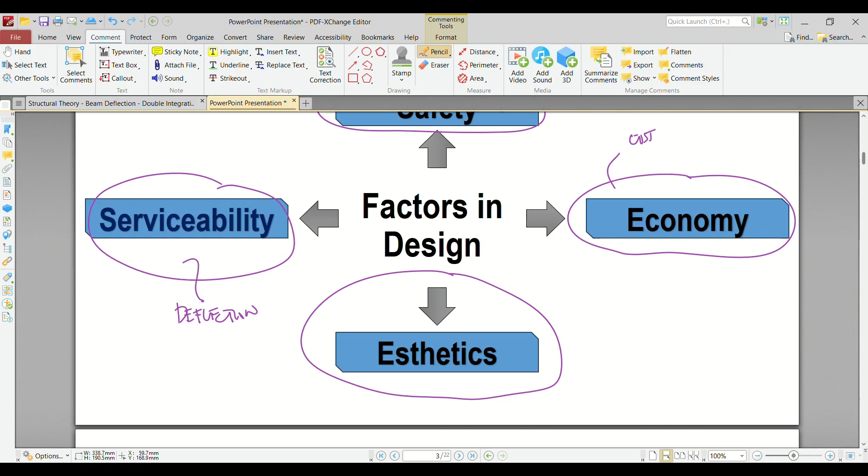Okay, so in beam deflection, we have various sources. Where do deflections come from? Number one is loading. Of course, any material subjected to any kind of loading will be subjected to deformation. Deformation is just another word to describe deflection in terms of structural theory, but they mean the same thing. We know this from mechanics of deformable bodies. For example, if I have a bar and I compress it, of course that bar will be subjected to shortening. It will become smaller. So that's the number one source of deflection.

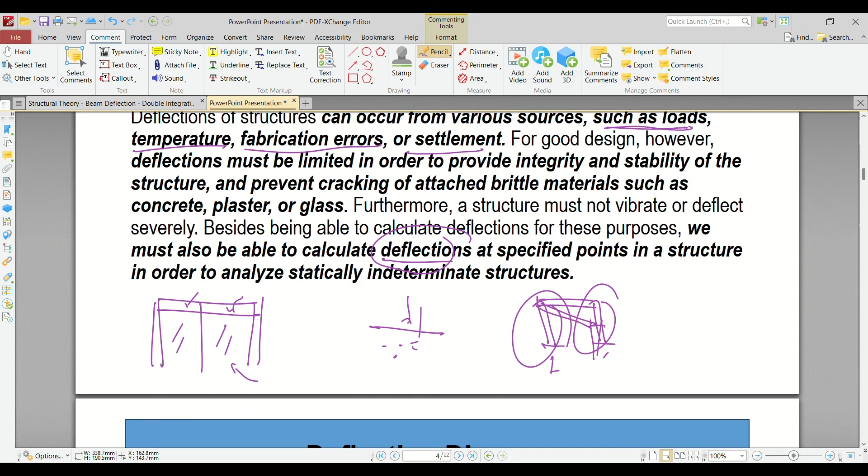Furthermore, a structure must not vibrate or deflect severely. Besides being able to calculate these deflections for these purposes, we must also be able to calculate deflection at specified points in a structure in order to analyze statically indeterminate structures. In indeterminate analysis, if we want to get the exact value of the moment, shear, and axial of a framing system, we must first calculate the deflection at specified points. Once you calculate the deflection, it does have an effect - say the beam has deflection, it affects the value of the moment, shear, and axial of a framing system. So it's truly important to calculate the deflection.

So what are the different principles we need to discuss in beam deflection? In beam deflection, we need to discuss the deflection diagram. This is important - what is a deflection diagram? Before the slope or displacement of any point on a beam or frame is determined, it is often helpful to sketch the deflected shape of the structure when it is loaded. This deflection diagram represents the elastic curve or the center line deflection of the member.

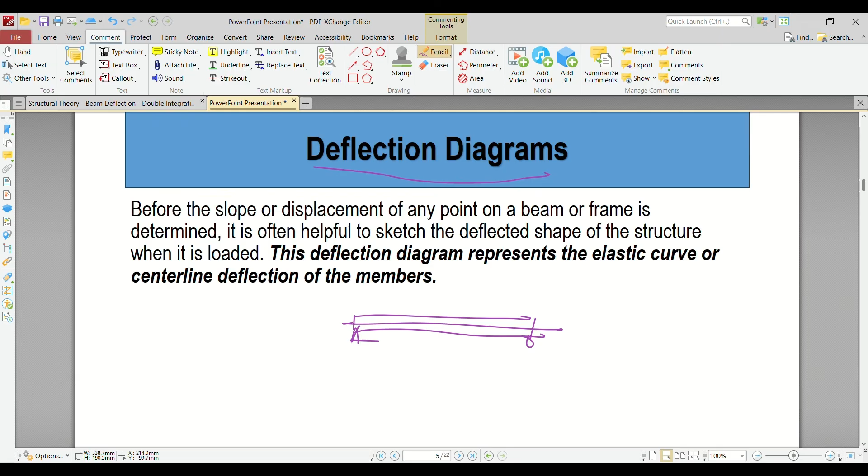What does that mean, class? For example, we have a beam, simply supported. The beam has a center line, or the middle, or the neutral axis as we call it. If this beam is subjected to loading - any loading - the beam will be subjected to deformation, or in our case, deflection. So what we do, and why we draw the diagram, is to represent the elastic curve.

Remember class, that is a curve, and that curve has an equation. Let me repeat - the deflected shape of the beam, its appearance, its line - because it's a line, or rather a curve - that curve has an equation, and that is called the elastic curve. Understood? The elastic curve is the center line deflection of a structural member.

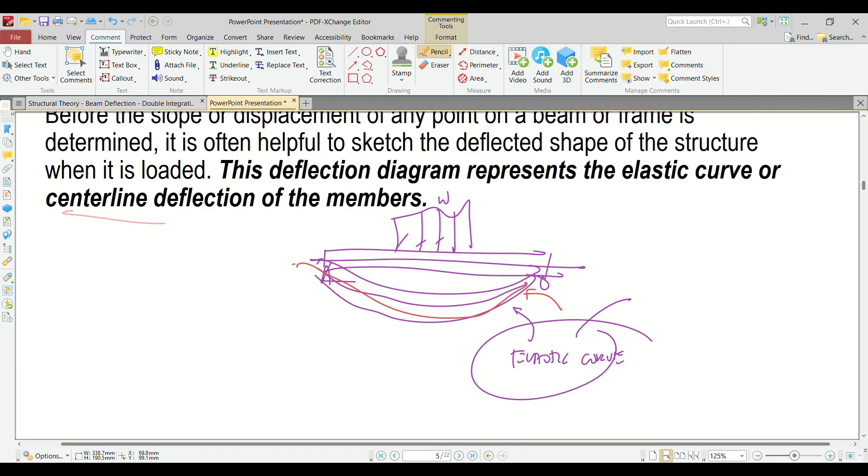Okay, so it's written there - center line deflection of members. Let's fully define the elastic curve. What is the elastic curve? The elastic curve is the curve that passes through the centroid of each cross-section of the beam, and in most cases it can be sketched without much difficulty. It's actually easy - what do we need to remember?

So ngayon, anong kinaibahan niyan sa pin support? Sa pin support kasi class meron. Paano ko nasabing meron? Kasi kapag naglagay ka ng tangent line dito, ganyan yung itsura. Pag naglagay ka ng horizontal line, ganyan naman yung itsura. So as you can see, it produces an angle like this. So meron talagang slope dito kapag pin support.

So ganun din po kapag roller ha. Kapag roller, meron din pong slope pero wala po siyang deflection. Ulitin ko, kapag pin tsaka roller, walang deflection pero merong slope. Kapag fixed naman, walang deflection, walang slope. Okay? So sana ma-understand natin yan.

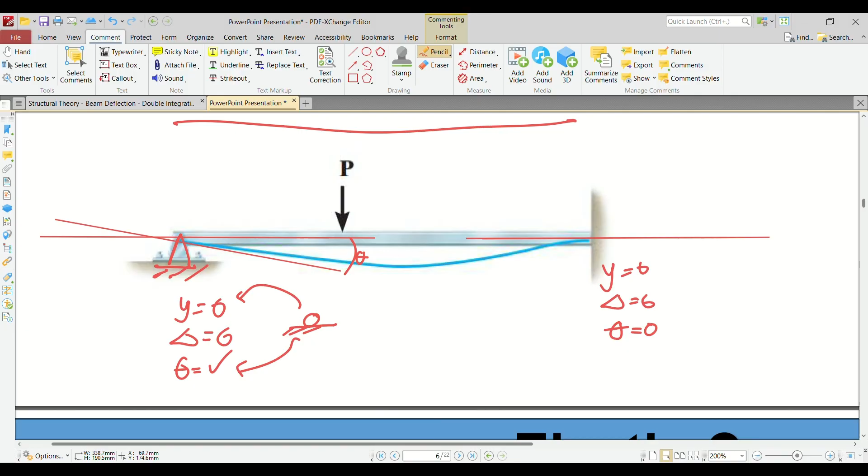So paano natin i-drawing yung elastic curve? So kung meron kang loading, of course, i-project mo lang yung deflected shape ng beam. So alam natin kapag pin tsaka fixed, walang deflection. Kapag fixed, wala ding slope. So magkakaroon ka ng elastic curve. Ito po yung blue line. Ang tawag po dyan is the elastic curve. Madali lang siya i-drawing in theory.

By the way, class, this is exaggerated. Kasi nga, hindi mo naman nakikita yung deflection in real life. So, makukompute lang natin yan, pero hindi natin masusukat natin, pero mahirap siya makita. So, kung maliit lang ang deflection, of course, mas maliit ang slope, mas maliit yung rotation. Okay? Again, yung blue line na nakikita nyo dyan, that is the elastic curve.

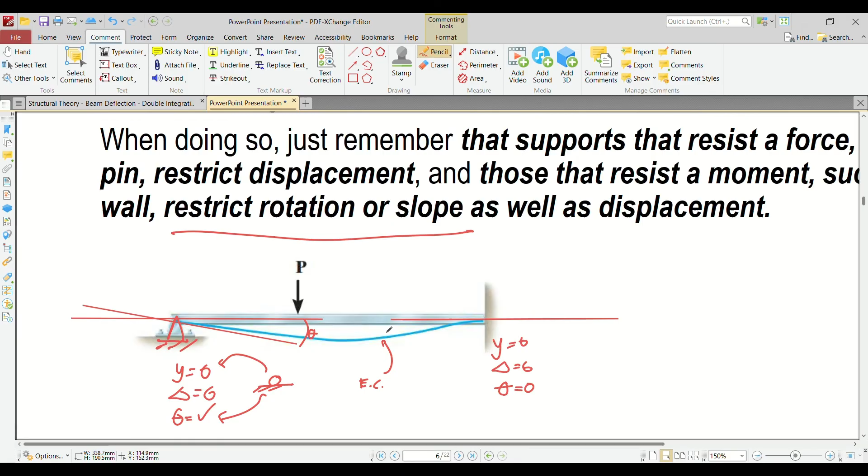Okay? So, ngayon, paano kung mahirap i-draw yung elastic curve? By the way, kukuha lang ako ng figure. Wait lang ha, hindi kasi nasama. Paano kung mahirap i-drawing yung elastic curve? Anong gagawin natin, class? O, pag mahirap i-drawing elastic curve, ganito.

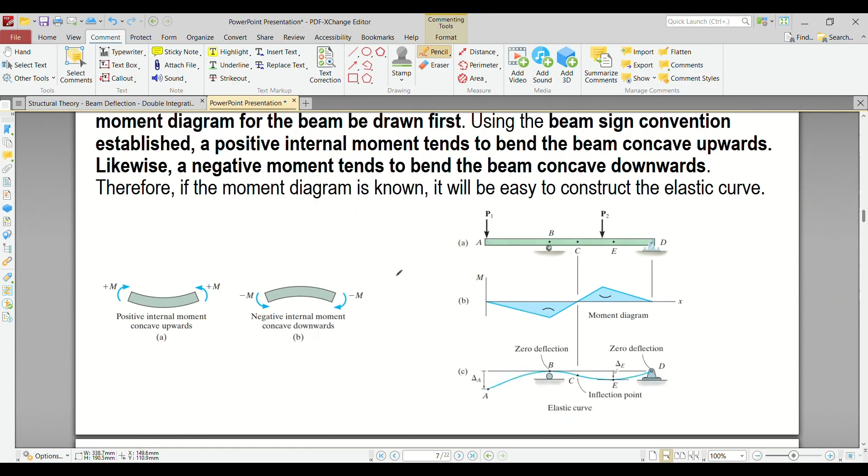If the elastic curve for a beam seems difficult to establish, it is suggested that the moment diagram for the beam must be drawn first. Using the beam sign convention established, a positive internal moment tends to bend the beam concave upward. Likewise, a negative moment tends to bend the beam concave downward. Therefore, if the moment diagram is known, it will be easy to construct the elastic curve.

Anong ibig sabihin yan, class? Paano daw kapag meron na tayong multiple loading? Just like this one, baka medyo mahirapan tayo sa pag-drawing ng elastic curve. Kasi dito, madali lang kasi single loading lang. What if we have multiple loading? Paano natin i-drawing daw yung elastic curve?

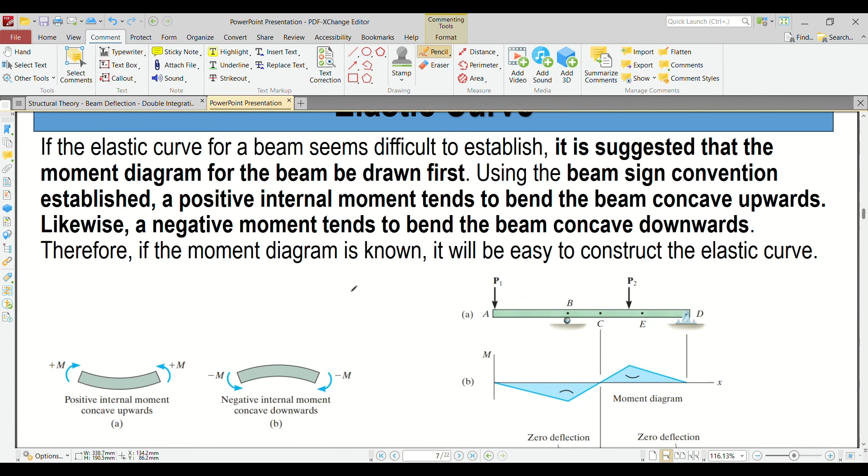Mas maganda daw kapag nagdo-drawing ka ng elastic curve is you need to draw the moment diagram. Anong ibig sabihin? Bakit ka kailangan mag-drawing ng moment diagram? Kasi pag na-drawing mo yung moment diagram, nagiging basis mo siya for the deflected shape of the beam. Anong ibig ko sabihin? Kapag positive moment, class, binibend yung beam mo concave upward or pa-happy face. Kapag negative moment naman, yung moment diagram mo, binibend yung beam mo concave downward or sad face.

So paano yun? So for example, we have this beam subjected to P1 and P2 loading. So sa baba, makikita yun yung moment diagram. So from point A to point C, as you can see, the moment diagram is negative. Now from point C to point D, the moment diagram is positive. So makikita nyo rin sa elastic curve yung kulay blue na line. So from point A to point C, that is projected concave downward kasi nga negative moment. Ngayon from point C to point D, that is projected concave upward kasi nga positive moment. So ganun lang po. Kung nahihirapan tayo mag-drawing ng elastic curve, i-drawing natin yung moment diagram para mas mapadali tayo.

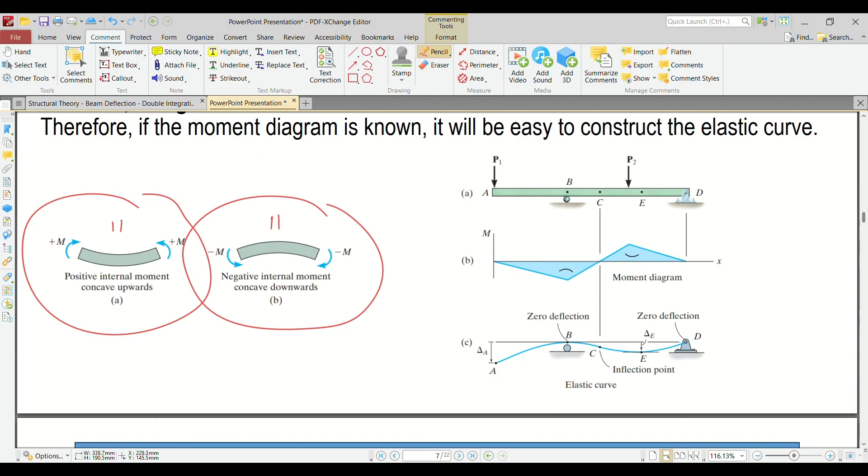Okay? So ngayon, let's derive the moment curvature relationship. So paano natin i-derive to, class? So wait lang, magpapalit lang ako. Baka nabura kasi yung mga nakasulat dito para mas madali tayong mag-derive, no? So, palitan ko lang yung module, ha? Okay, so we're back, no?

So, eto na tayo. Meron na tayong derivation dito. Paano ba natin i-derive to, class? Ngayon, mag-start tayo with differential strip. So, for example, we have a beam subjected to any kind of loading, kahit ano, no? Kuha tayo ng isang maliit na element. Yung width niyan, class, tawagin nating dx.

Yung dx class is located at exactly na neutral axis of the beam. So, kunyari, ito yung neutral axis, no? Tawagin natin yung distance from here to here, this is dx. Okay? So, ito yan ha. Ito yung differential strip na to ha. Nilakihan ko lang. Ngayon, anong mangyayari, class? So, sukat kang y distance from the top, simula dito hanggang dito, sukatin natin y distance. Tapos, tawagin natin yung nasa taas, ds prime. Ito rin yan. Okay? So, ano bang mangyayari if the beam is subjected to loading?

So, mangyayari, class, magiging parang part siya ng sector ng circle. Parang ganito, para siyang pizza pie, no? So, ano mangyayari dyan, class? Yung sa neutral axis natin, ito pa din, no? Ito, magiging dx. Yung sa taas, yung y distance from the dx sa taas, no, magiging hindi to ds prime ha.

This is ds, class, magiging ds prime. So what's the difference between ds and ds prime? Bakit ganon? Kasi yung dx natin hindi nagbago, no, nung nag-bend yung beam. Kapag, again, ito ay hindi pa subjected ng loading, ito subjected ng loading.

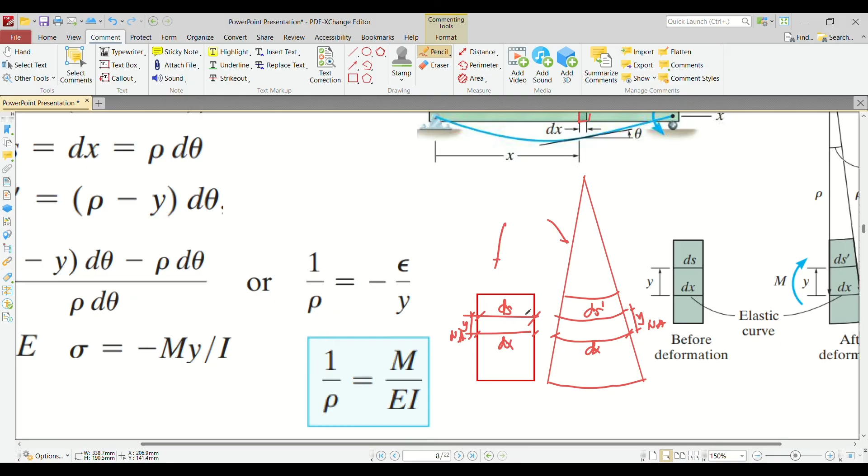Ba't ganon? Ba't nagbago? Yung dx, same lang, yung ds prime, yung ds, naging ds prime. It all revolves to the stress diagram of bending stress. O ano ba yung bending stress diagram? So, kunyari, meron tayong ganito class, no? Ito yung representation ng bending stress ng beam. So, ano bang mangyayari dyan? Kunyari, kino-consider natin yung beam na yan, ganito mangyayari na bending stress dyan. Bending stress diagram.

Okay? So, paano mangyayari dyan? Sa top part, makaka-experience ng compression, so papunta sa left. Sa bottom part, makaka-experience ng tension, so papunta sa right. So, ito class yung neutral axis natin.

Ngayon, ito class, ang height niyan para makuha mo, that is fb = My over I. So, kadalasan yung y class pinapalitan ng c. C represents the distance from the neutral axis to the extreme tension or compression fiber. But yung mas generic na formula is my over I.

So, ganun din sa kabila, no? Para makuha mo tong height nito, this is my over I pa rin. Pinagkaiba lang nila, this is in compression kasi nga, magko-compress yung beam mo sa taas, just like what happened in this one. Sa baba naman, may stretch, so that is subjected to tension.

Ngayon, class, kapag nagsukat ka ng y distance immediately after the neutral axis distance, no? Sa taas ng neutral axis, y, ito yung makukuha mo na stress. So, as you can see, sa neutral axis, we don't have any bending stress. And the beam is subjected to bending stress, no? Dahil wala tayong bending stress, of course, wala din tayong deformation.

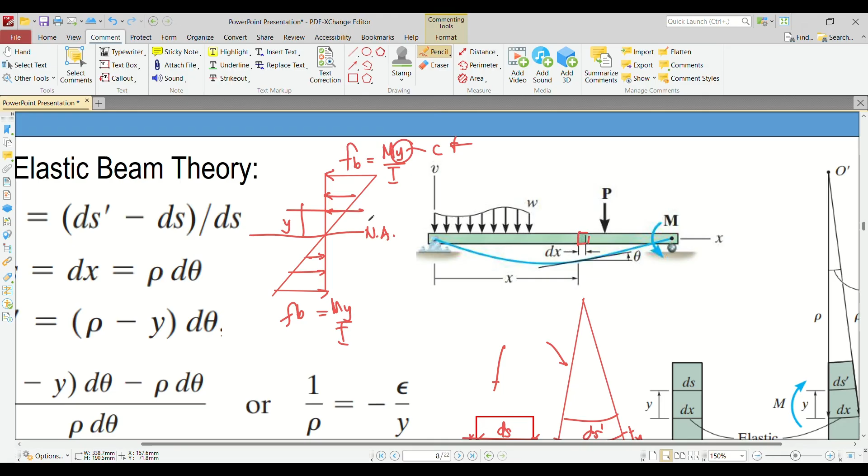Pero immediately after the neutral axis, it can be either top or bottom, in our case, in top, no? Magkakaroon tayo ng stress. Kapag meron tayong stress, of course, we do have what do you call this? We do have deformation. So kapag deformation, itong ds na to, hindi natin pwedeng tawagin ds din to. Kasi nga, nagkaroon na tayo ng deformation. So tawagin natin ds prime yan.

So ngayon, anong gagawin natin dito sa dalawang to? How can we derive the formula for the elastic curve? So madali lang class, no? Gagamit lang tayo ng concept ng strain. Ano ba yung concept ng strain? Sabi ng strain, para makuha mo daw siya, that is change in length over original length.

So in our case, the change in length is ds prime minus ds over ds. Okay? So yung change in length natin, ds prime minus ds, and then yung original length natin, ds. Okay? So ngayon, paano natin to i-derive further? We need to calculate what's the value for ds prime tsaka ds. Paano ba natin makukuha yon?

Since this is a sector of a circle, we can use the concept of a circle. Paano ba yon? So ngayon, dahil dx to class subjected, para siyang, di ba, part ng circle, ito subjected to sa angle. So tawagin natin d theta yung angle. Itong angle na to class is in radians, no? Ngayon, para makuha natin tong value ng dx, since this is a part of the circle, and dx is an arc length of a circle, kailangan natin ng radius, o ito yung radius natin. Radius of curvature, no? Tawag dyan rho, no?

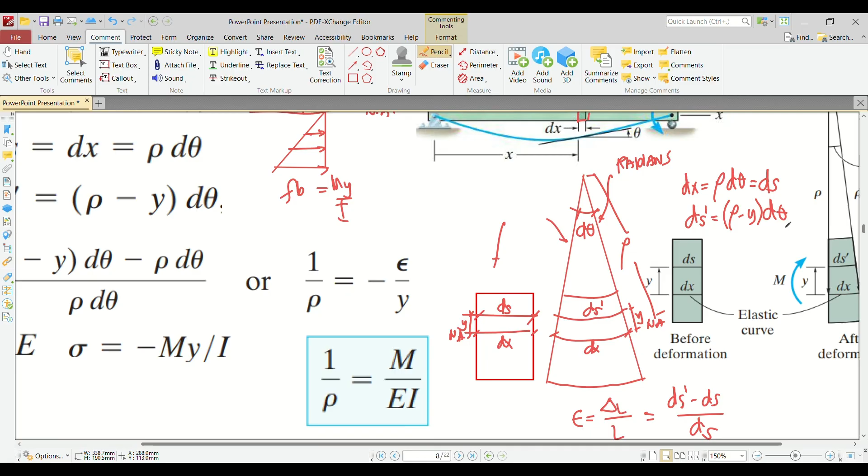So, paano yon? E di gawin mo rho minus y. Ito yung rho mo. Ito yung y. O ito yung naging radius ng ds prime, no? Multiplied by d theta. So, meron na tayong ds prime tsaka ds.

O, we can now substitute that here. So, ito naging formula natin. Again, ds is equivalent to dx, which is equal to rho d theta. ds prime is rho minus y multiplied by d theta.

Ngayon, ano mangyayari sa derivation natin? Pwede na natin i-plug in yan dito. Yung ds prime mo, rho minus y d theta. Yung ds is rho d theta. Ang mangyayari, class, pwede natin i-cancel si d theta. Tsaka si rho, tsaka si negative rho.

So, ano nangyari sa calculation natin? Ang nangyari, class, is 1 over rho is equivalent to negative strain over y. Bakit nangyaring ganon? So, ganito yan, class, no?

So ang mangyayari, ang matitira dito, class, is negative y over rho. I want to isolate 1 over rho. So ang gagawin ko, yung negative y, lilipat ko sa kabila, so magiging denominator, yung y, tsaka negative. So ang mangyayari, class, is 1 over rho is equivalent to negative strain over y. So yun yung nakita nyo dito.

Okay, so ngayon, alam naman natin na based on stress-strain curve, meron tayong tinatawag na slope of the stress-strain curve. Ano yon? Yung slope, class, is E, or the modulus of elasticity. That is equivalent to stress over strain.

Ngayon, pwede nating kuhanin si strain dito, tapos i-substitute natin dun sa formula natin. Paano yan? So edi cross multiply, no? So is equivalent to stress over E.

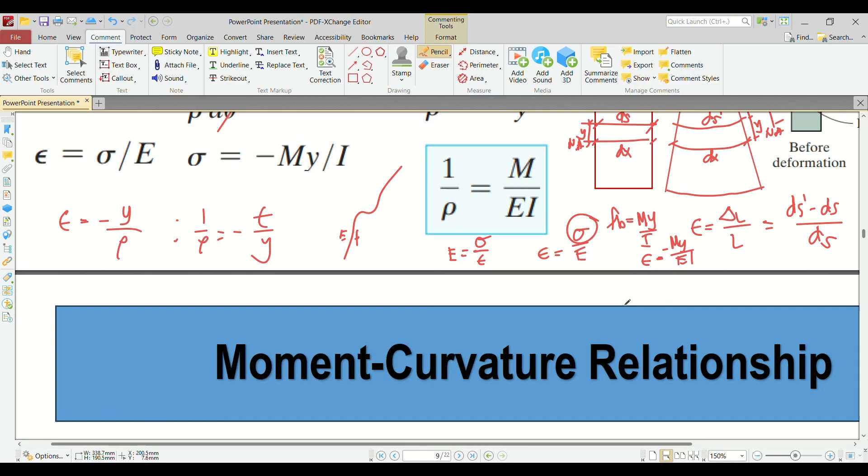So by the way, since compressive bending stress ang pinag-uusapan, this has a negative value. Okay, so itong value na to, pwede mong i-substitute dito.

So pag sinubstitute mo yan, ang mangyayari, class, si y, dahil may y ka dito, pag sinubstitute mo yung e, or yung strain, mangyayari, magka-cancel si y, magka-cancel din si negative, so the resulting equation now is 1 over rho is equivalent to M over EI. Okay, so ano yung 1 over rho, class?

Yung 1 over rho ay tinatawag na radius of curvature, no? Sorry, yung rho is tinatawag na radius of curvature, yung 1 over rho is tinatawag na curvature. Lumalabas po yan sa board exam. Okay, ulitin ko, ha. Yung rho is the radius of curvature, and then yung 1 over rho is the curvature.

Okay, and then yung M is the internal moment in the beam at the point. E is the modulus of elasticity. I is the beam's moment of inertia about the neutral axis. Okay, so ito na, stick na tayo sa formula na to. Again, yung 1 over rho is the curvature, rho is the radius.

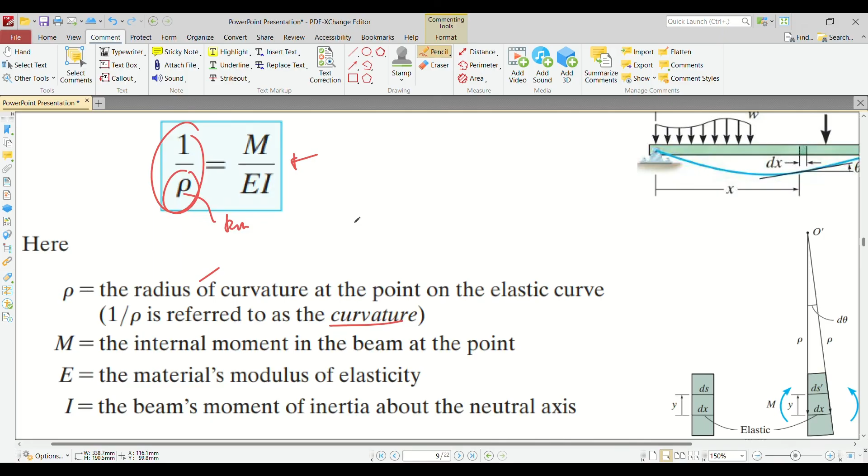So ngayon, anong gagawin natin dito? We need to relate this. Since this topic is double integration method, we need to relate this into double integration. Paano yon? So meron kasing curvature formula din sa differential calculus. Ano yon? So ito yung formula ng curvature sa differential calculus, class.

So ano to? So yung nasa taas, class, pwede mo rin yan tawagin na y double prime. Itong nasa taas, pwede nating tawagin y double prime. Ito, class, na nasa baba, pwede mong tawagin na y prime or yung slope. Again, yung y prime is the slope that is equivalent to tangent theta.

Okay, so ngayon, in order to derive this further, yung tangent theta, class, pwede pa nating i-simplify. Kasi for very small angle, remember yung slope natin, sinabi ko kanina, napakaliit, kasi nga exaggerated yung mga drawing natin. For very small angle, tangent theta is approximately equal to theta.

Okay, ibig sabihin, ito daw yung slope. Ngayon, class, kung meron kang very small angle, meron kang very small na value, in-square mo pa, this will be approximately equal to 0, itong part na to. Kasi maliit na ngayon theta eh, in-square mo pa, so magiging 0 na to, itong part na to.

So ilan natira sa equation natin? Yung natira sa equation natin, class, is 1 over rho is equivalent to, meron kang natirang 1 raised to 3 over 2. Ano ba yung 1 raised to 3 over 2? That is just equivalent to 1, so hindi ko nasusulat, y double prime na lang.

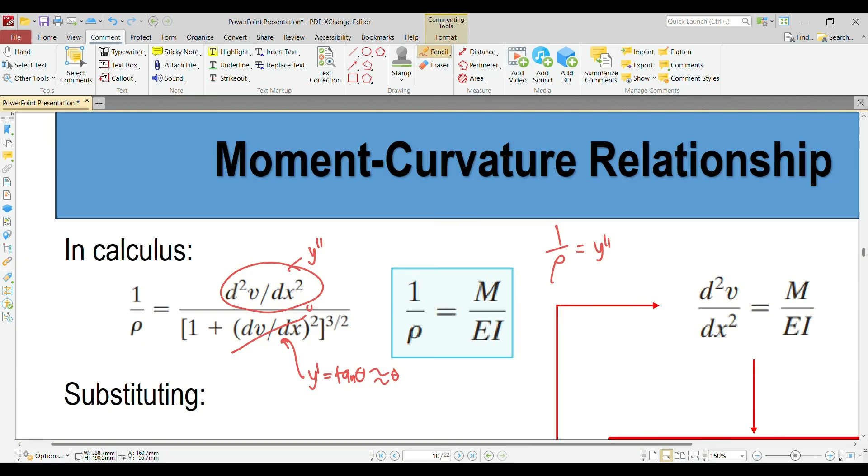Okay, so meron kang 1 over rho dito, meron ka ding 1 over rho based on the beam, so pwede nating pag-equalin. So anong resulting equation ang mangyayari sa atin? So ito, magiging EI y double prime. So from here, pwede nating i-simplify dito, so bali magiging y double prime is equivalent to M over EI. So pwede nating ilipat to if the beam is prismatic and same material.

Pwede nating ilipat sa kabila, gawing constant. So, magiging EIY double prime is equivalent to M. So, this is now the formula for the elastic curve of the beam. Remember, elastic curve is a curve, so ibig sabihin, it does have an equation. Dito natin makukuha yung equation ng elastic curve, sa EIY double prime.

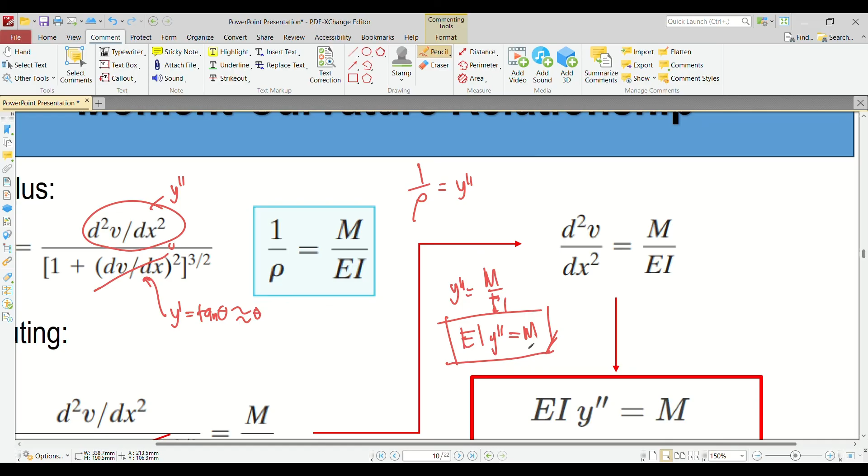Okay, discuss natin kung ano-ano yung mga variable dyan. Sabi dito, class, in integrating EIY double prime is equals to M, the resulting solution must contain two constants of integration, since EIY double prime is equals to M is of second order. These two constants must be evaluated from known boundary conditions concerning the slope and deflection at certain points of the beam. So anong ibig niya sabihin? Bakit kailangan natin mag-integrate ng dalawang beses?

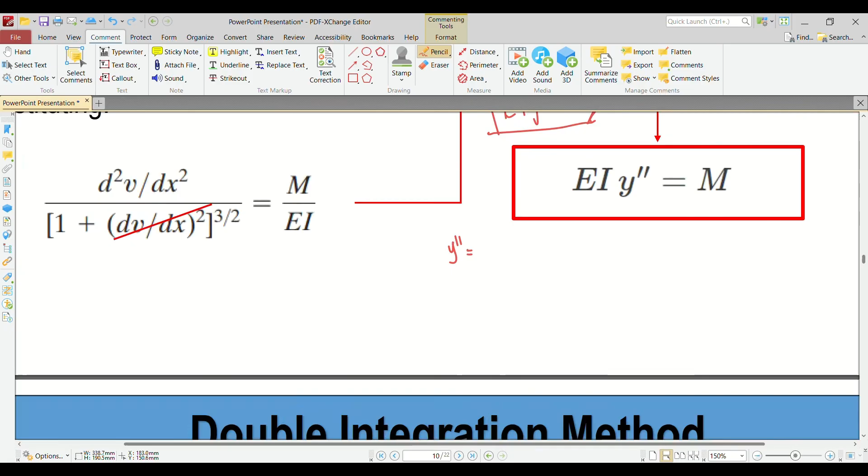So ganito kasi class, no? Yung Y double prime, tanggalin ko muna yung EI kasi constant naman, no? Yung Y double prime, remember, this is the elastic curve equation. Ngayon class, kapag in-integral mo yan, magiging Y prime yan. Ano ba yung Y prime? Again, based on my statement kanina, this is the slope of the elastic curve. Ngayon, another integration, this is now where you produce the deflection equation. So ibig sabihin pala, yung Y double prime, para makuha mo yung deflection, integrate mo na dalawang beses.

And of course, kapag nag-i-integrate ka ng indefinite, ibig sabihin wala pong limit, kailangan mo mag-add ng two constants. Kaya nakasulat dito, magkakaroon ka ng two constants. And those two constants can be solved using boundary condition.

Ano yung alam natin na value ng slope at deflection? Kapag pin support or roller support, alam natin wala tayong deflection dyan. O delta, tsaka Y, parehas lang yan. Ngayon, ano pa yung alam natin boundary condition? Kapag fixed end, wala tayong deflection, wala din tayong slope. So yun yung known boundary condition. Mamaya, di-discuss natin fully, but for this one, ito muna.

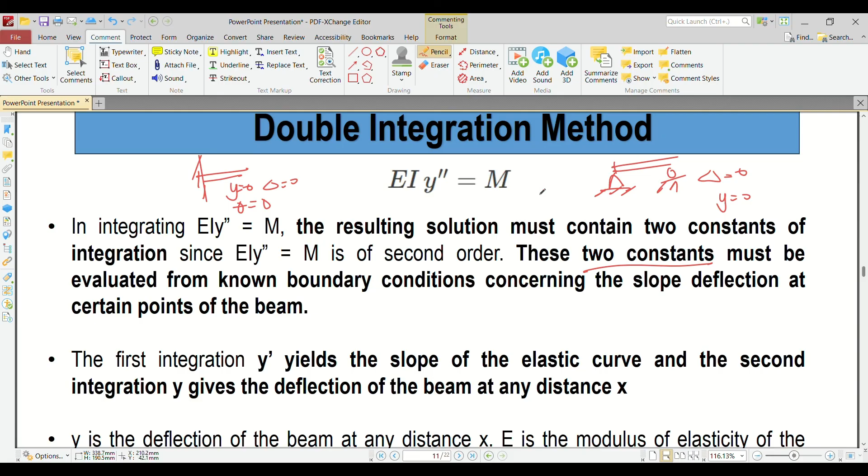Now, again, just like I did earlier, yung Y prime is the slope of the elastic curve, and the second integration, Y, gives the deflection of the beam at any distance x. Y is the deflection of the beam at any distance x, E is the modulus of elasticity, I represents the moment of inertia about the neutral axis, and M represents the bending moment at a distance x from the end of the beam. The product EI is also called flexural rigidity. Kadalasan kasi class, yung E tsaka I hindi separate na binibigay. So pag sinabing flexural rigidity, ibig sabihin pinag-multiply na yung E tsaka I doon.

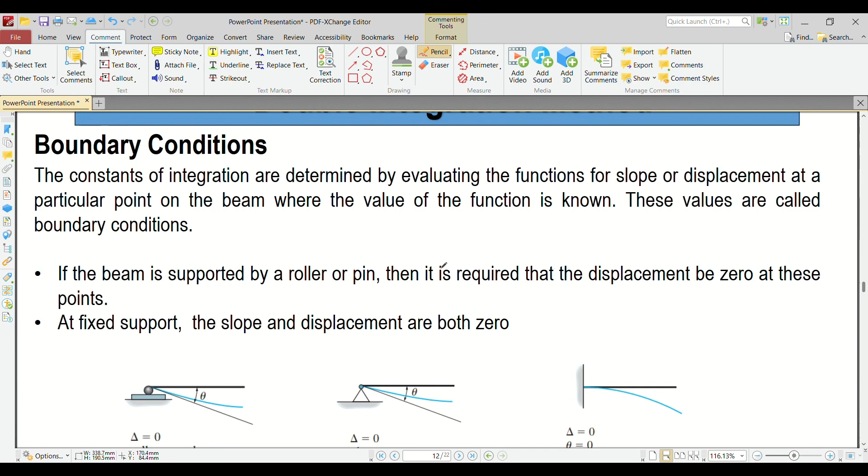Okay, hopefully you do understand. So now, let's discuss the boundary condition. The constant of integration are determined by evaluating the function for slope or displacement at a particular point on the beam where the value of the function is known. These values are called boundary condition. If the beam is supported by a roller, then it is required that the displacement must be 0 at this point.

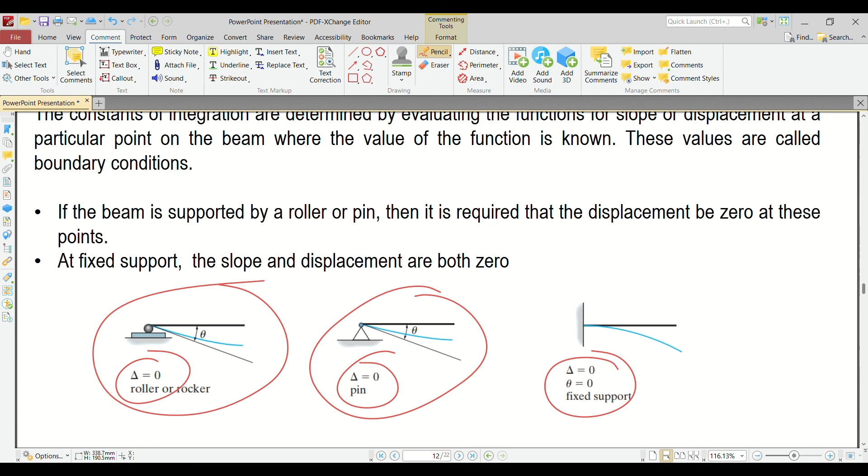So just like I said, kapag roller tsaka rocker, kapag pin, ang deflection mo ay 0. Ngayon, at fixed end, the slope and displacement are both 0. So nakikita nyo dito, yung deflection tsaka yung slope ay 0. So yan yung gagamitin natin na boundary condition in order to get the value of the two constants ng integration.

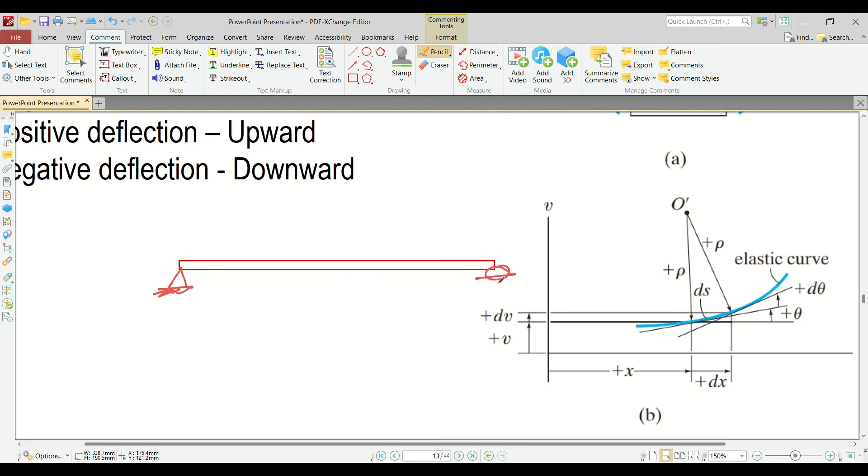Okay, so now let's discuss the sign convention. Madali lang naman yung sign convention, class. So for example, we have a beam, simply supported na lang para madali, subjected to any kind of loading. Pero drawing muna natin yung support. So kunyari, subjected yan sa kahit anong loading, W. So ano mangyayari sa beam natin? Of course, the beam will deflect, no? Ganito yung itsura ng beam deflection. Tapos paano natin makukuha yung sign convention?

So pag nag-double integration tayo, class, ganito yung sign convention. Lagay ka ng tangent line dyan. So let's say we want to get the value of the slope here, and we're going to determine if it is positive or negative. Dapat i-consider mo for the sign convention is always the rotation from the horizontal line to the tangent line drawn from the curve. So anong ibig sabihin nun, class? Kunyari ito yung horizontal line, ito yung tangent line. Yung rotation niyan, class, as you can see, is clockwise. Kapag clockwise, class, tingnan natin dito. Kapag clockwise, inaasahan mo na slope value dyan ay negative.

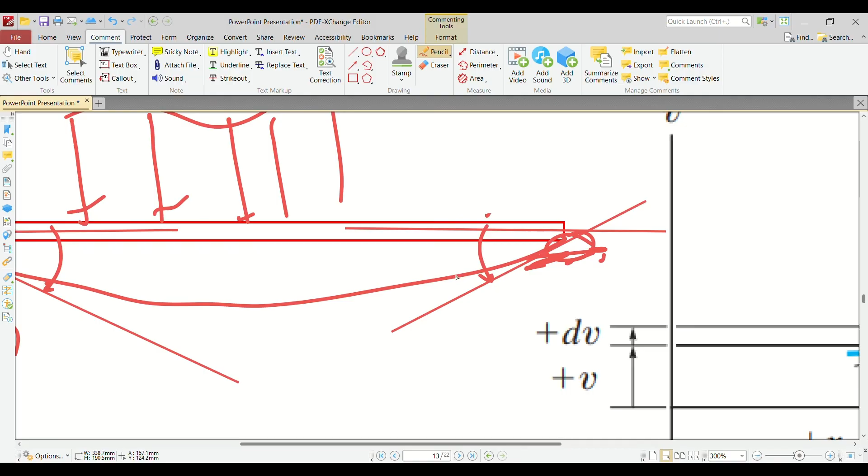So sa kabila, kapag maglagay ka ng tangent line dito, tapos ito yung horizontal line, as you can see, the rotation from the horizontal line to the tangent line is counterclockwise. So yung inaasahan na slope mo dyan should be equivalent to positive.

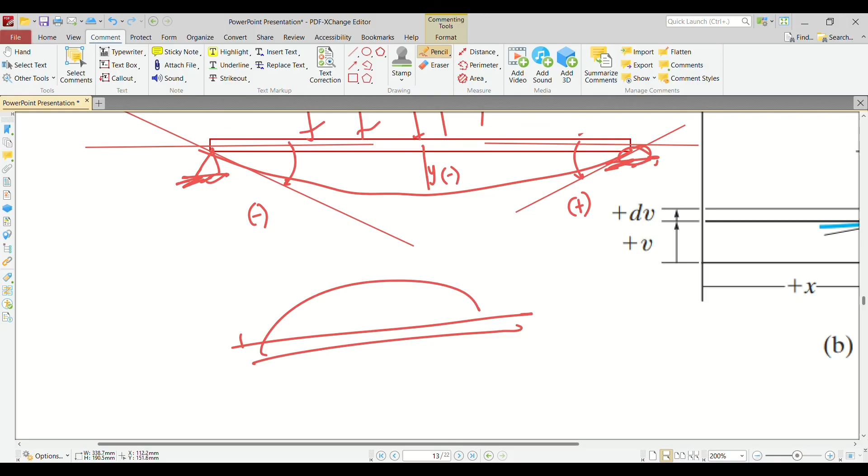Okay, so paano naman kapag deflection? Kapag pababang deflection, class, inaasahan mo na value sa calculation mo should be negative. Ngayon, kapag pataas naman yung deflection, let's say meron kang beam, tapos nag-deflect ng ganyan, ang asahan mong value dyan should be positive. Hopefully na-realize yung sign convention for double integration method.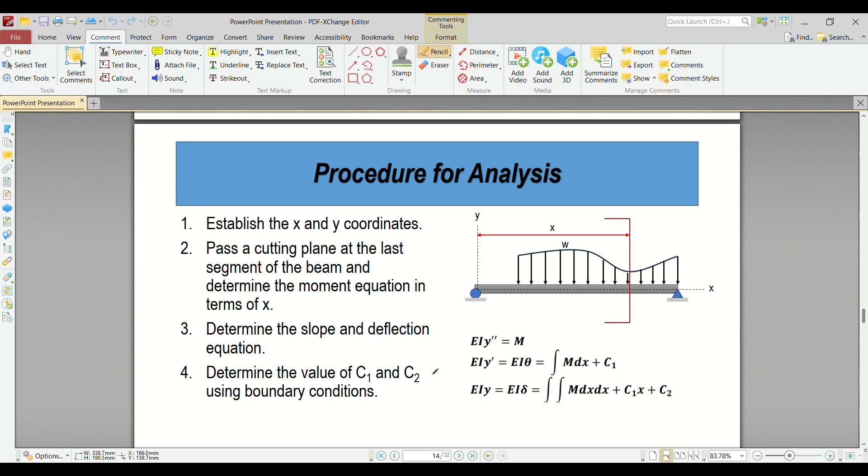So now let's discuss the procedure for analysis. Madali lang to, class. First is you need to establish x and y coordinates. So paano yun? Ito yung x ko, ito yung y ko.

And then, cut in the last segment of the beam. So anong ibig sabihin ng last segment? Dapat po lahat ng loading mo masakop. Lahat ng loading mo may equation.

Ulitin ko, kailangan mong i-cut yung second one, kailangan mong i-cut sa last segment ng beam. Ibig sabihin, lahat ng loading dapat merong equation.

So number 3, determine the slope and deflection equation. Paano mo ma-determine yun? Kailangan mong kuhanin yung M as a function of x. After you determine the value of M, you will do double integration - unang integration yields the value for the slope, and the second integration yields the value for the deflection.

Of course you will arrive with two constants. Yung two constants na to can be solved using boundary condition. Again, pin, roller, zero deflection; fix, zero slope, zero deflection.

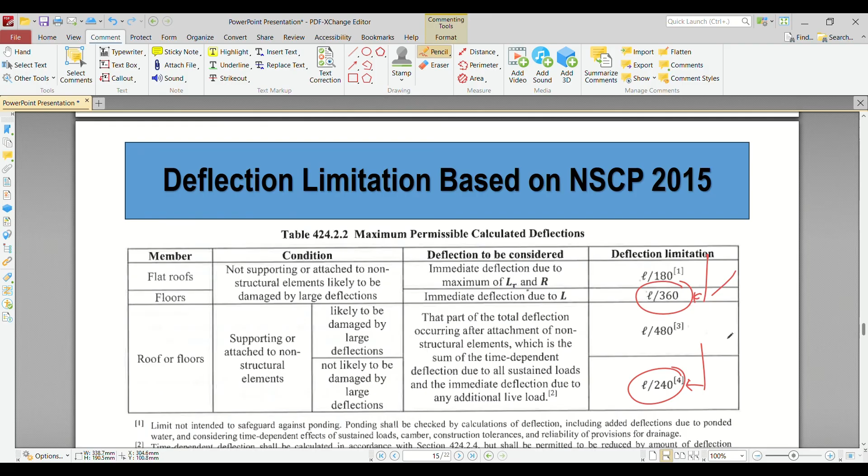Okay, so now meron din tayong tinatawag na deflection limitation for NSCP. Ang kadalasan na ginagamit dito, class, is L over 360 tsaka L over 240. But what's the difference between the two? Ginagamit po yung L over 360 kapag may masisirang kahit anong bagay sa baba na magdi-deflect na member. Ginagamit naman yung L over 240 kapag wala naman nasisira, kapag nag-provide ng large deflection yung ating structural member. Ulitin ko, L over 360 kapag may masisira sa baba, L over 240 kapag wala namang masisira.

Okay, so after that, para meron tayong sample problem, let's change to PowerPoint presentation or PDF.

Okay, so let's try to solve problem number 1. Sabi dito, calculate the following for the given beam. Assume EI is constant. Kapag constant yung EI, pwede natin siyang ilipat sa kabila.

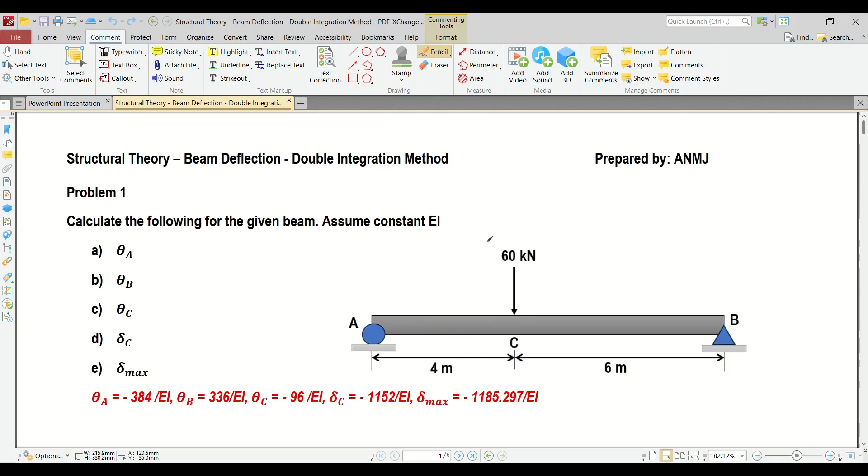Just like what we did, first thing we need to do is we need to establish x and y coordinates. So ano ba yung x and y coordinates natin? Yung y ko is dito na lang sa may point A. Yung x ko ay magmumula sa center line ng beam, hindi ko na siya isusulat para medyo madali. Okay, so ang gagawin natin, i-redraw natin yung beam para medyo maayos.

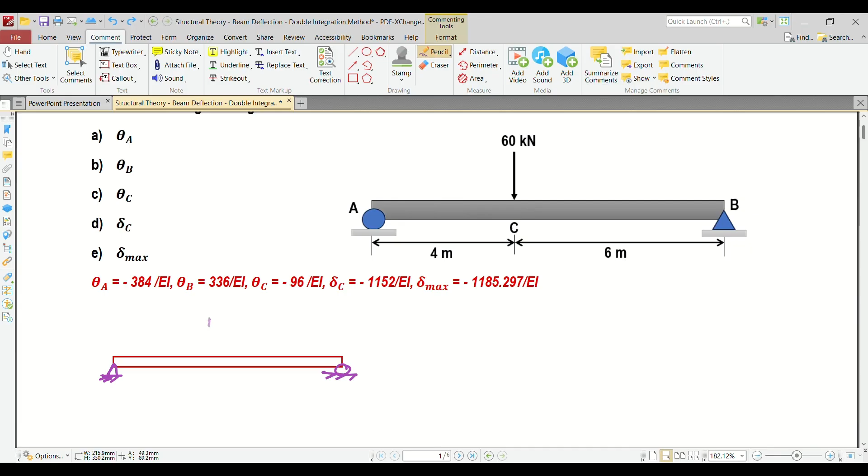We have a pin and then a roller. And then after that, we need to project the loading: 60 kilonewton, this one is 4 meters, this one is 6 meters. So again, this is point A, this is point C, point B.

So ngayon, paano gagawin natin? We need to cut this sa last segment. In our case, that is the last segment. Tapos, ang distance from here to here, sukat lang natin, tawagin natin x.

Okay, so ngayon dahil nag-cut tayo and we need to create moment equation, kailangan natin ng reaction dito, or RA. How do we get RA? Pwede tayo mag-summation moment sa B.

So paano yan? Summation moment sa B equals 0, clockwise positive. So what will happen: we have RA times the distance, that's 10, minus 6 times 6 equals 0. So yung RA natin, class, is 60 pala ito - sorry, 60 times 6. So RA is 60 times 6 divide by 10, so this is 36 kilonewton. So meron tayong RA, this is 36 kilonewton.

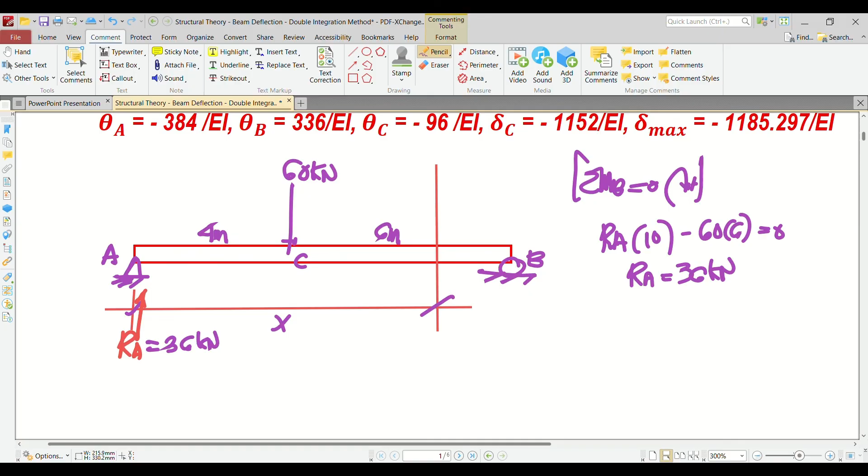So para mas maayos yung analysis natin, I can isolate this one, yung cutting plane. So ito yung cutting plane natin.

Okay, so we do have a reaction here, 36 kilonewton, and then we also have 60 kilonewton. So the distance here to here is x. And the distance from here to here is 4 meters. So if that's 4 meters, the remaining distance is x minus 4.

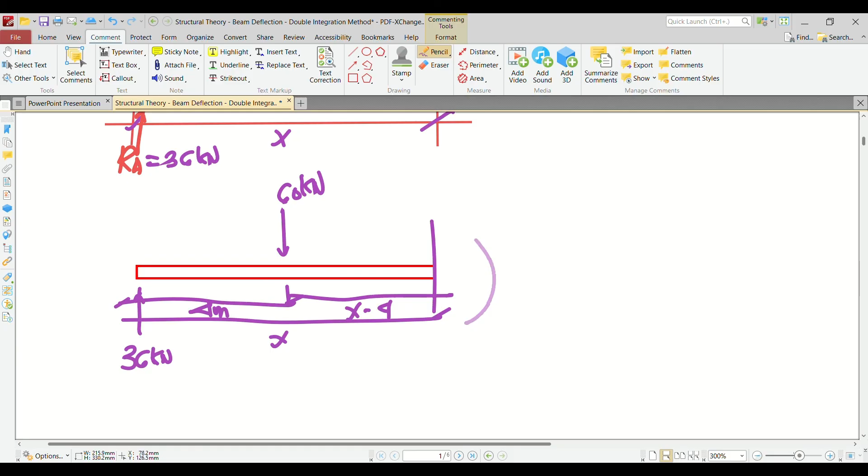So when we cut, just like in our previous discussion, when we cut, we consider the left side, and the direction of the moment is counterclockwise. So we need to create a moment equation. How do we create the moment equation? So here's the rule: opposite direction, positive. Same direction, negative. So how does that work?

So M is equivalent to... how? 36 is opposite, so 36 times x, positive, right? And then minus, 60 is in the same direction. So 60 bracket x minus 4.

So what's the meaning of the bracket, class? The meaning of the bracket actually comes from the Macaulay function. What does Macaulay mean? Let me write the name. Macaulay function. So what does the Macaulay function mean, class?

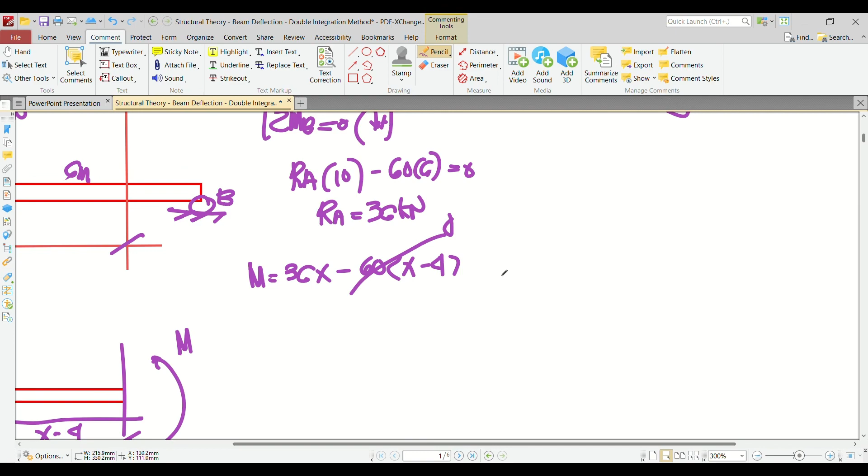It means, when the value inside the bracket becomes negative, you will deem this expression as 0. When the value inside the bracket is negative. But if it's not, it's not 0. So why is that? What's the reason? Let's make a side note to explain that phenomenon.

So for example, we have a cantilever beam. Then 2 meters is the distance here. This is 2 meters, 2 meters. Let's say we have a loading of 100 kilonewton. So now, what we need to do is create a moment equation. So how do we do that? We need to cover all the loading. So let's cut here. The distance, class, is x. Now, our rotation is clockwise.

So to get the value for the moment equation, we need to get this distance. What is that? It's easy, right? That's x minus 2. So the moment equation here is, 100 negative since it's the same direction, times x minus 2.

So let's try, when x equals 3, what's the value of the moment? If you can see here, if x equals 3, our analysis is somewhere in the middle. So if x equals 3, that would be 1 meter. So our value should be around 100, since 1, the distance, times 100. So if x equals 3, based on the figure alone, the value should be 100.

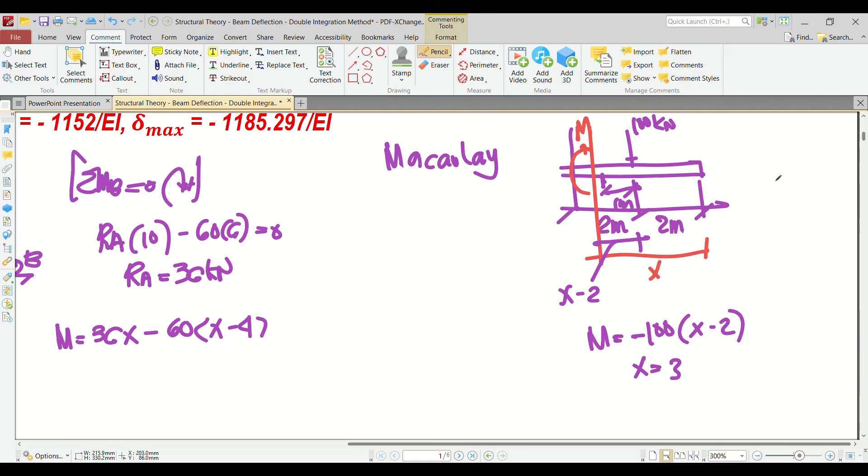So let's try. What happens? M is equivalent to negative 100 times 3 minus 2. And indeed, M is negative 100 kilonewton meter. So this is correct, okay?

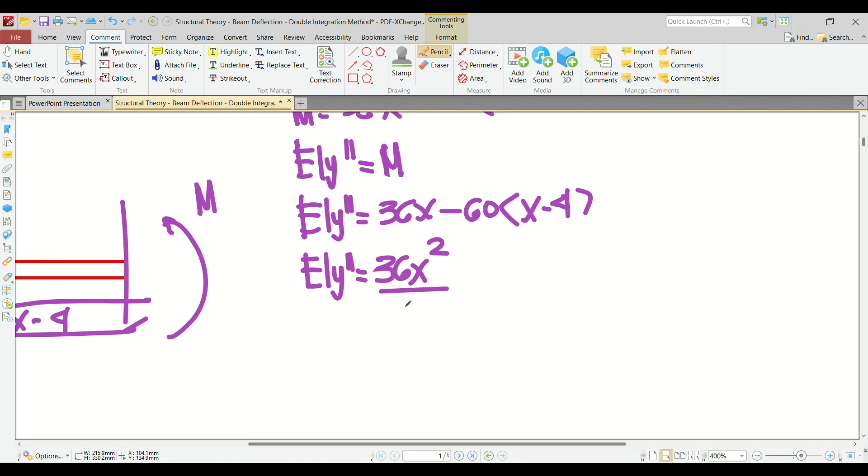So how do we do it when it becomes an integral? Let's say we integrate x squared dx. We have a formula for that, right? How's that? We have x to the n plus 1 over n plus 1 plus C. So now, when we integrate x squared, the value that comes out is x cubed over 3 plus C, okay? That's if we have a single x. Now what if we integrate x plus 3 squared dx? It's the same thing, right?

So, bali mangyayari, x plus 3 to the n plus 1 over n plus 1 plus c. So ang mangyayari kapag in-integral mo yan, x plus 3 cube over 3 plus c. So kaya ganun yung nangyari dito. Okay? Hopefully naiintindihan na, no?

O, anong sunod? Another integration. By the way, this is not y double prime, this is y prime na lang kasi nag-integral na tayo. Okay? Another integration is EI y is equivalent to 36x cubed over 6 minus 60x minus 4 cube over 6 plus yung C1 mo, malalagyan na ng x plus C2 kasi nag-integrate ka no? Okay? So we have the general formula.

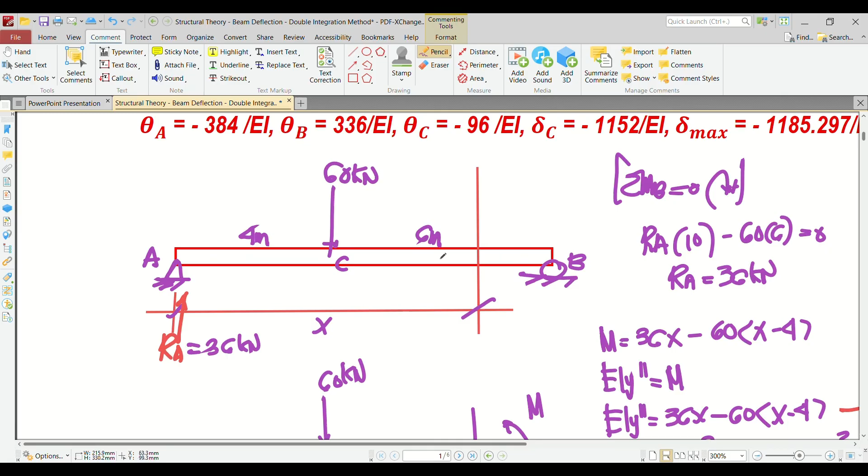So ngayon, paano tayo makapunta sa pin tsaka sa roller? Dahil nag-cut tayo, kinonsider natin yung left side. Para makapunta tayo dito sa pin, dapat yung x value natin is equivalent to 0. So yun yung gagawin natin for boundary condition. So ilagay natin dito. When x is equivalent to 0, alam natin na nasa pin yung analysis natin. Kasi 0 yung x mo eh.

Alam natin kapag sa pin, ang value ng deflection ay 0. So ilagay natin dyan. Ano mangyayari kapag yan yung scenario natin? So 0 ito, ilagay natin 0. Ito kinukuha ko, to deflection equation, para makuha si C1, C2.

So bali mangyayari 36, 0 cube over 6 minus 60, 0 minus 4 cube over 6 plus C1, 0 plus C2. So what will happen? This will become 0. Ito class, nag-negative sign yung nasa bracket, so you will deem this as 0. This is 0. So basically, yung C2 natin is equivalent to 0.

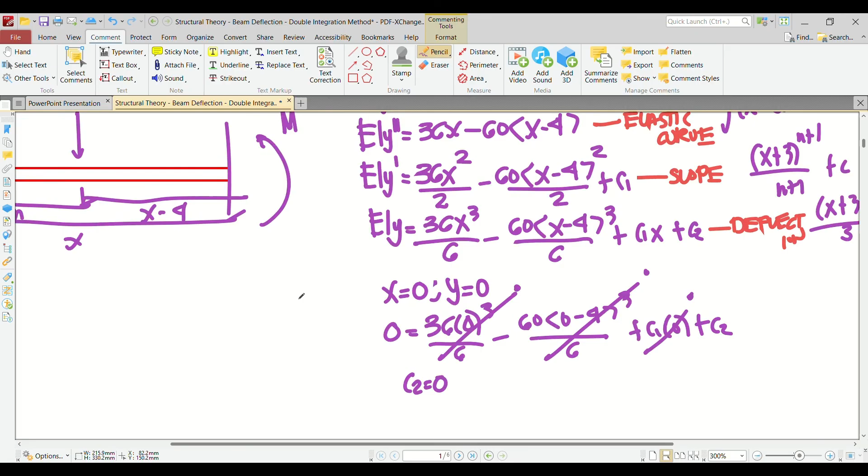Okay? So ngayon, anong next? Para makakuha pa tayo ng value for C1, we have the next boundary condition. Ano yon? Yung roller mo sa kabila. So paano ka ba makakapunta sa roller? Kung nagsimula yung x mo sa point A, para makapunta ka sa roller, dapat x is equals to 10. No? So yun yung next boundary condition mo.

So ilagay natin dito. If x is equals to 10, alam natin kapag roller, 0 din yung deflection. So i-plug in ko ulit dito sa equation na to. Pwede kong kopyahin na lang to, palitan ko ng 10 yung 0. So paano? So 0, 36, 10 cube over 6 minus 60 bracket 10 minus 4 bracket cube over 6, and then plus C1 times 10. Hindi ko nalalagay yung C2 kasi 0 naman. Okay, let's calculate that. Anong value natin for C1?

4 cube over 6 plus C1 times 10. So ang lumalabas sa aking class is negative 384. So yan na yung value natin for C1.

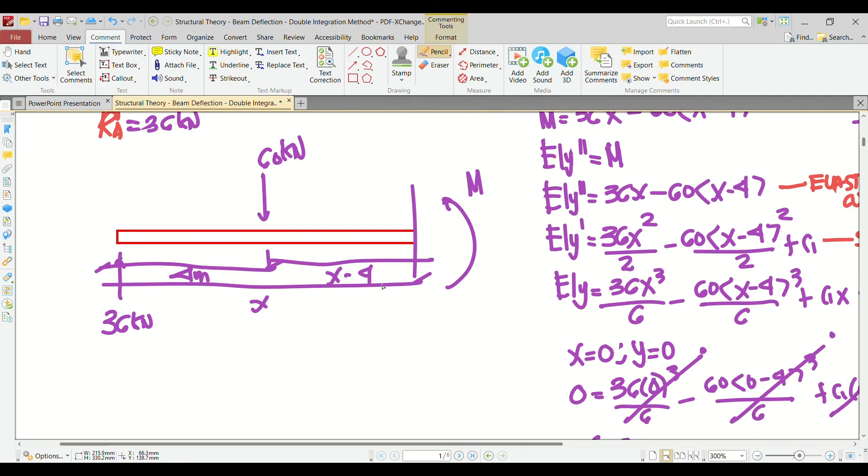Okay? So after that, we can now proceed to the unknowns. Ano ba hinahanap sa letter A? Sa letter A class, hinahanap yung slope sa point A. So paano tayo makakuha ng slope sa point A? Di gamitin natin yung slope equation, and then kailangan natin ng x value. Para makapunta ka sa analysis mo sa point A, dapat yung x mo ay equivalent to 0. No? So paano gagawin yun?

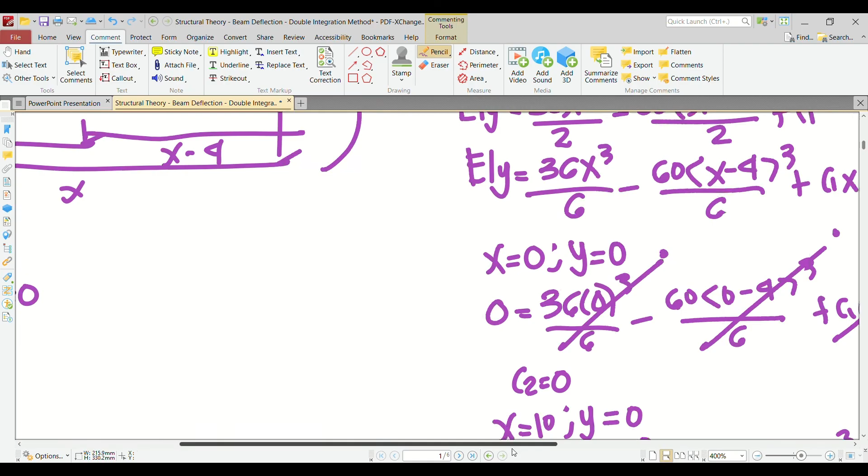So lagay natin dito, ha? Sa point letter A, ang hinahanap is theta A. To get the value of theta A, x is equivalent to 0. Tapos gagamitin natin yung second equation. Ito, so paano yan? So theta A is equivalent to, paano to? 36x squared over 2, 60x minus 4, paano yan?

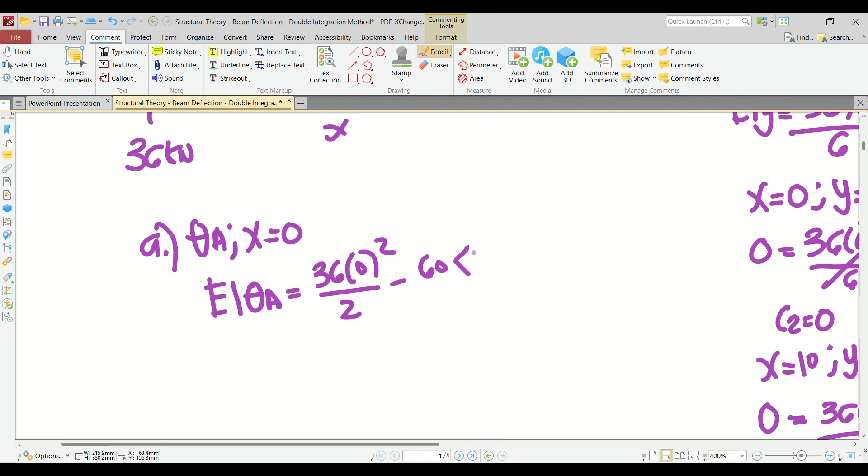So, 36, 0 squared over 2 minus 60, 0 minus 4 squared over 2, and then plus C1, kung di ako nagkakamali, plus C1, pero yung value ng C1 natin class is negative 384. So ilagay natin dito, negative 384. So this will become 0. Ito, 0 din. So yung theta A natin class is equivalent to negative 384 over EI. Okay? So this is now our answer for letter A, number 1.

So ngayon, anong meaning ng negative sign? Ang meaning ng negative sign class, that your rotation of the slope from the horizontal line to the tangent line is clockwise. Okay? Ano pa?

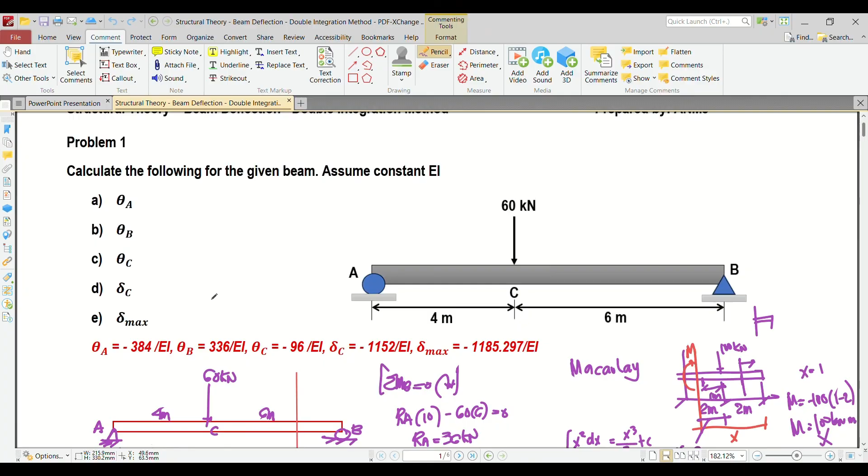Sa letter B, proceed na tayo. So ano bang hinahanap sa letter B? Sa letter B class, ang hinahanap is theta B. Paano ka makakapunta ng theta B? Nagsimula yung x mo from A. Para makapunta ka ng theta B, dapat x is equals to 4 plus 6, which is equivalent to 10.

Okay, so theta B, x should be equivalent to 10. So EI theta B is equivalent to... let me copy this equation, just replacing the 0 with 10. So: 36(10)^2/2 minus 60(10-4)^2/2 minus 384.

Now class, when you calculate that, let's see what theta B gives us: 36(10)^2/2 minus 60(10-4)^2/2 minus 384. So what I get, class, is positive 336 over EI.

So what does positive 336 over EI mean? It means that when the sign is positive, the rotation from the horizontal line to the tangent line is counterclockwise. We'll draw that later.

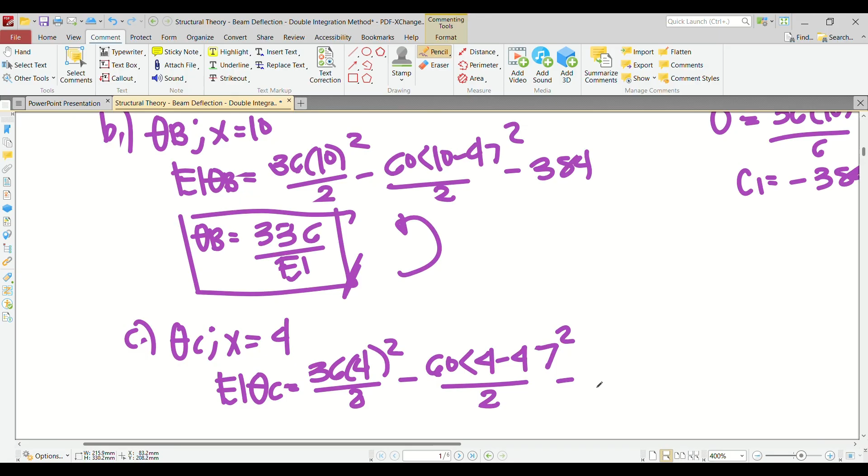So what happens is EI theta C is equivalent to 36(4)^2/2 minus 60(4-4)^2/2 minus 384 — again I'm just copying this, replacing the x. This becomes 0. So what is the value of our theta C? Let me just calculate it.

So what I got, class, is negative 96 over EI. So what does the negative sign mean? It means that your rotation for the slope from the horizontal to the tangent line is in the clockwise direction.

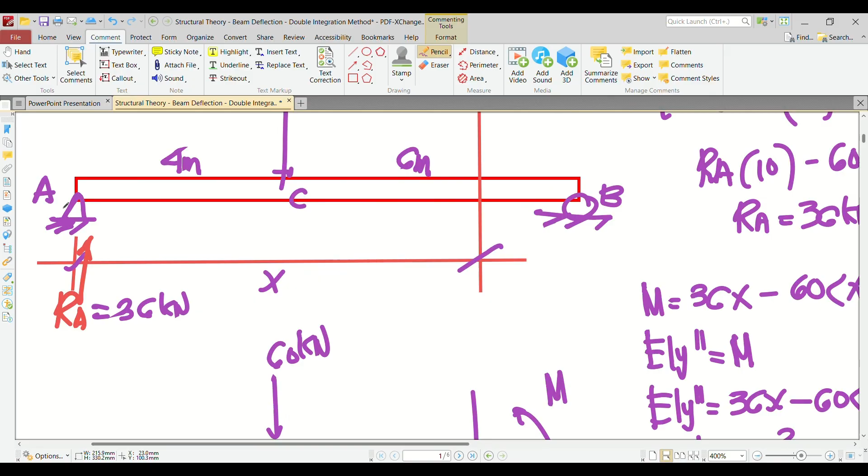Okay, so how do we get that? We need a third equation: 36x^3/6 minus 60x minus 4 cubed over 6 minus 384 times x. Let's place that here. So EI YC...

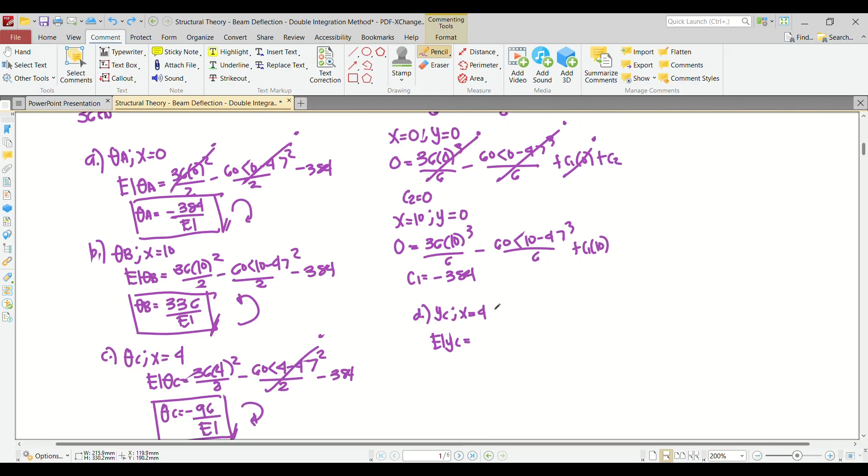Again, this is the equation we'll use: 36x^3/6 minus 60(4-4)^3/6, and then next is minus 384, our C1, now with x equal to 4. So now how do we solve this? This becomes 0. So what is our YC?

So what I got, class, is negative 1152 over EI. Okay, so this is now your answer. What does the negative sign mean? It means that your deflection is directed downward. Okay, so that matches what we expect.

And then lastly, we need to find the maximum deflection. Now class, when you look for maximum deflection, you just need to understand one concept. Let's place E here. When looking for maximum deflection, you just need to remember that the slope must be equivalent to 0. Why? Because a slope of 0, class, is a horizontal line. That means your tangent line and the horizontal line coincide, they align.

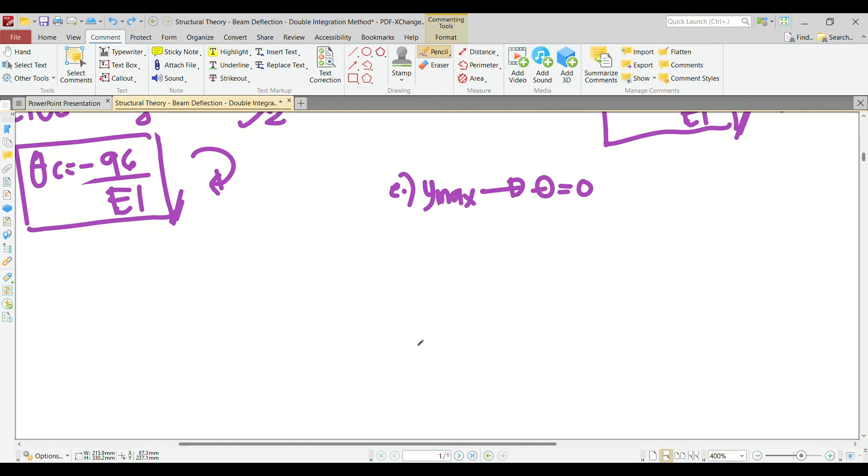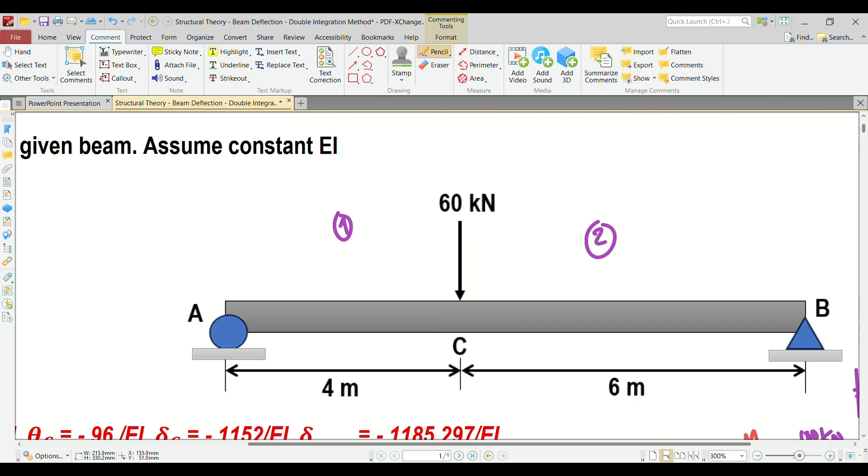How do we create the scenario? When there's a change in loading condition. For example, from point A to point C, there's a concentrated loading — that's our first scenario. Our second scenario, from point C to point B, there's a reaction. So it's either of the two; only one can provide the maximum deflection. It could be from here to here, or from here to here. Okay, let's start with our first assumption.

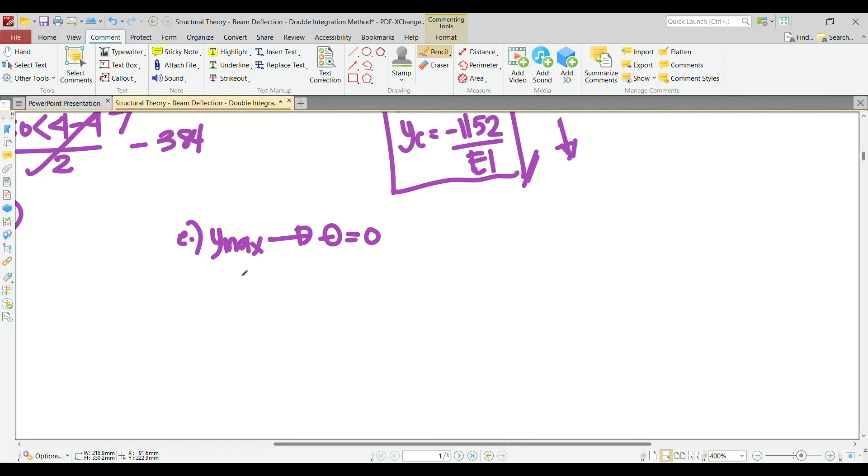So our first assumption is that the maximum deflection happens between point A and point C. That means our x value, or the location of zero slope, must be greater than 0 but less than 4. Okay, so in that scenario, with slope equal to 0, to determine the value of x, we can use the slope equation. Let's just copy this and set y prime to 0. So what happens?

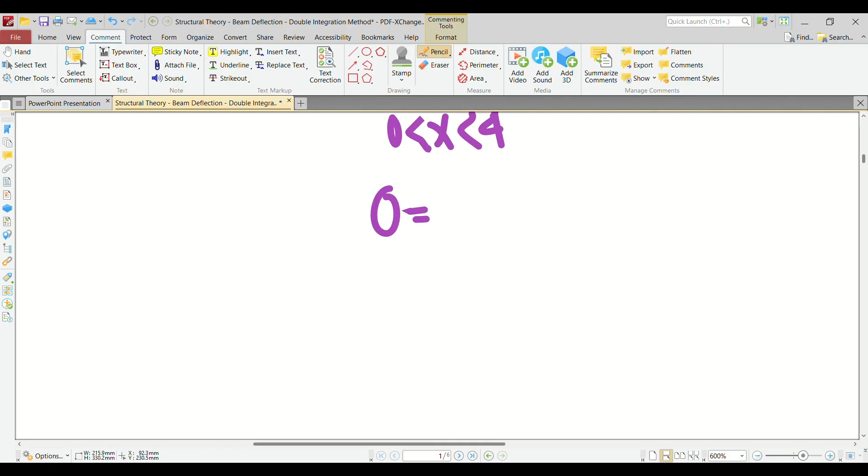So 0 is equivalent to, if you'll remember the equation, basically 36x squared over 2. Ngayon, ito na yung tricky na part na na-compute ko na.

Class, ang analysis natin, dapat yung x value ay hindi lalagpas ng 4 for first scenario, kasi from 0 to 4, any number you substitute in this expression will make it 0. So therefore, in computation for the x value, hindi ko na siya isasali. Ang isasali ko na lang is si C1. Kasi kung anong number man yung isubstitute mo from 0 to 4, you will make this bracket negative and this will become 0.

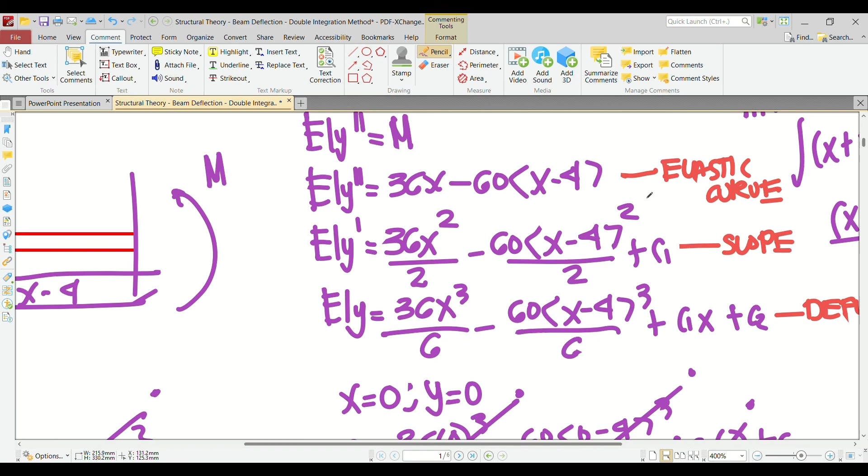Okay, so ngayon i-plug in natin, negative 384. So anong value kaya ng x natin based on the first scenario? Nagpa-processing lang yung calculator ko. Ang nakukuha ko is 4.6188

meters. Ngayon, tama ba tong x value na nakuha natin? That is incorrect. Bakit po incorrect? Kasi inassume natin na dapat less than 4 yung ating location, no? Ang lumabas nagpas 4.6188, so definitely that is incorrect.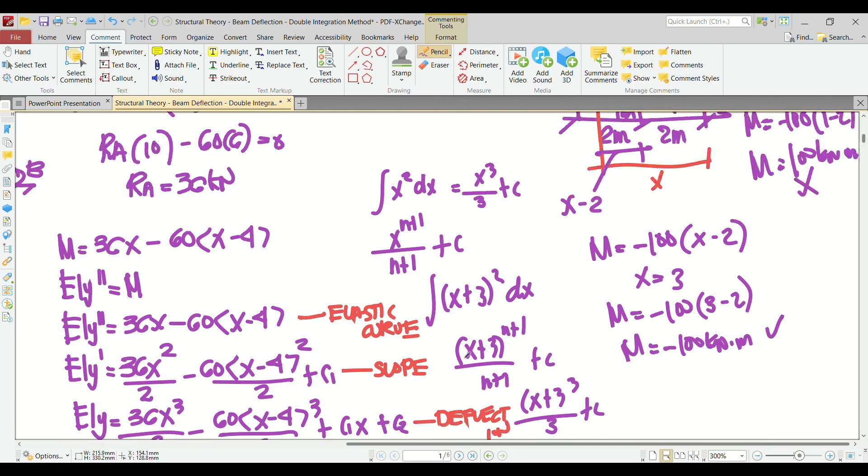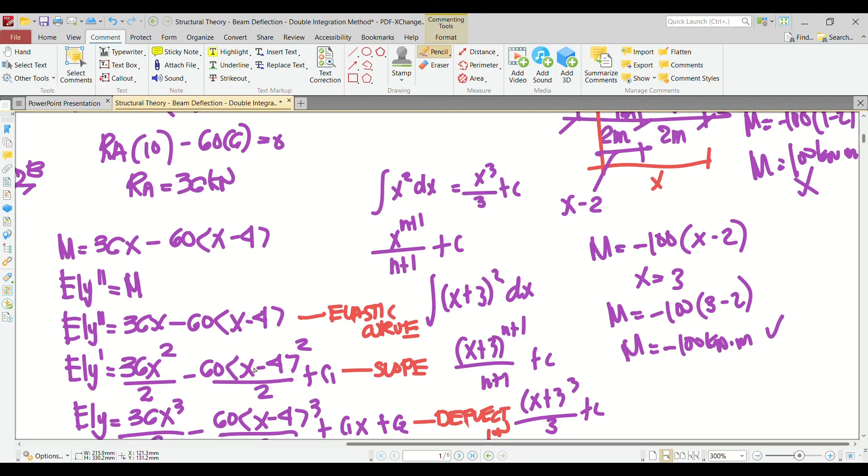So anong ibig sabihin niyan, class? Ibig sabihin, hindi nagmumula from point A to point C yung maximum deflection. Nasaan? Yung maximum deflection ay mag-occur from point C to point B. Okay? If that's the case, kailangan natin itong isama sa calculation natin for x, kasi any number greater than 4 but less than 10 will make this expression valid, hindi siya 0.

So paano gagawin natin doon? I-compute ulit natin yung x. Again, second scenario, dapat lagpas na sa 4, pero of course hindi lalagpas sa 10. Okay? So ang mangyayari: 0, 36, x squared over 2, minus 60, bracket x minus 4 squared over 2, minus 384. So ngayon, anong gagawin natin? Shift solve lang natin and then determine natin yung x value.

So ang lumabas sa akin, 4.7085 meters. Ngayon, tama ba yan? Of course tama yan, because that is in between 4 tsaka 10. Okay, so yan na yung gagamitin natin in computation for the maximum deflection.

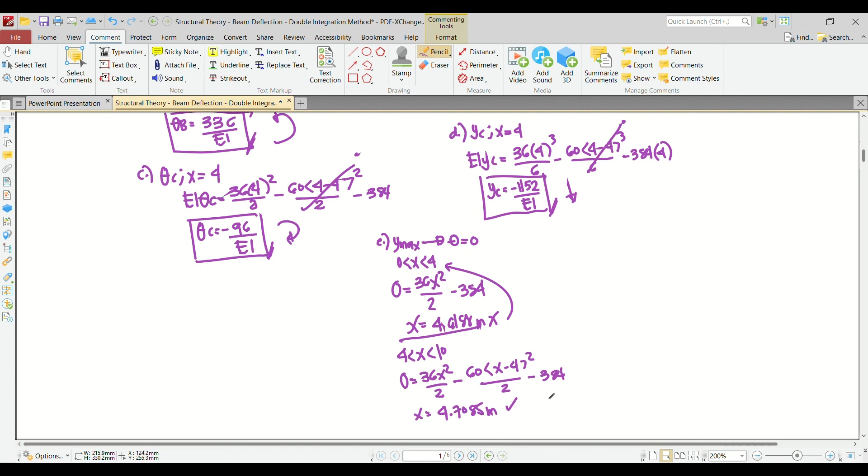So kukuhanin natin itong equation na ito and then isa-substitute natin yung x na nakuha natin. Paano yan? Lagay ko dito: EI Y max is equivalent to 36, tapos ang nakuha nating x is 4.7085 cube over 6, minus 60, 4.7085 minus 4 cube over 6, minus 384, times 4.7085. Okay? So ngayon, anong value ng y max natin?

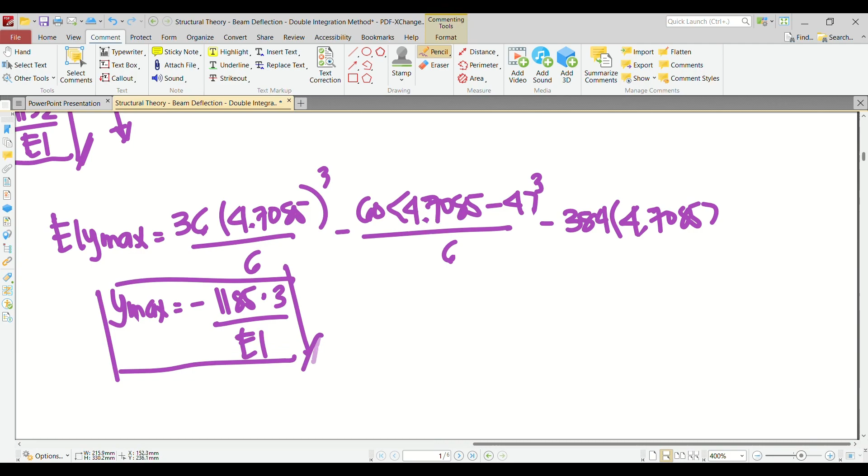4.7085 minus 4 cube over 6 minus 384. So ang lumalabas sa aking class is negative 1185.3 over EI. Okay, so that is our answer. Let's see if we're correct. 297, tama naman, 297, or in one decimal point, negative 1185.3. Okay, so that's how we answer problem number 1.

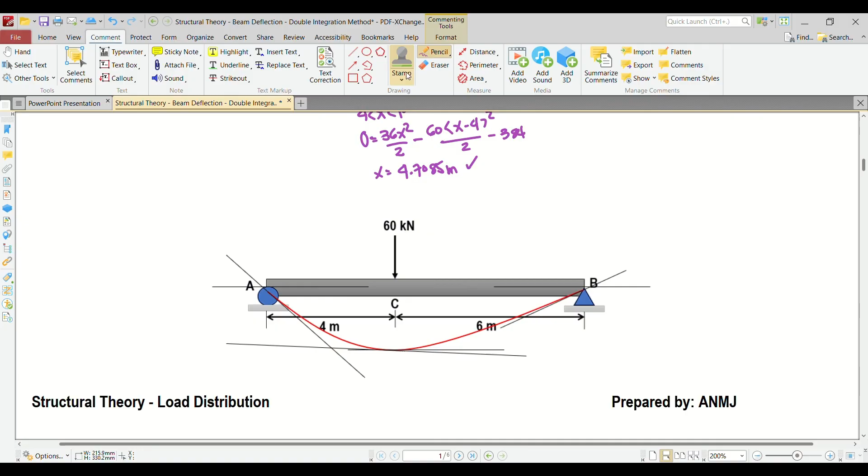Okay, discuss ko lang po kung ano-ano yung mga na-compute natin kanina for our problem number 1. I-drawing lang natin yung elastic curve. By the way, yung pulang linya, yun yung elastic curve natin. Ngayon class, ipa-flatten ko lang ito. So ngayon class, let's discuss what are those values that we computed earlier.

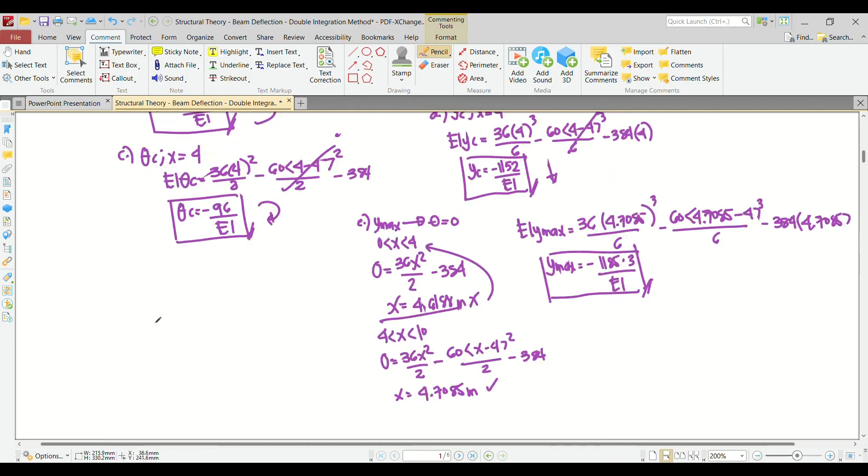So anong gagawin natin? Pag tinignan nyo dito, yung value natin for theta A is negative 384. Anong ibig sabihin ng 384? Ibig sabihin, yung rotation niya from the horizontal line to the tangent line is moving in clockwise direction. So ito yon, ito yung theta A mo.

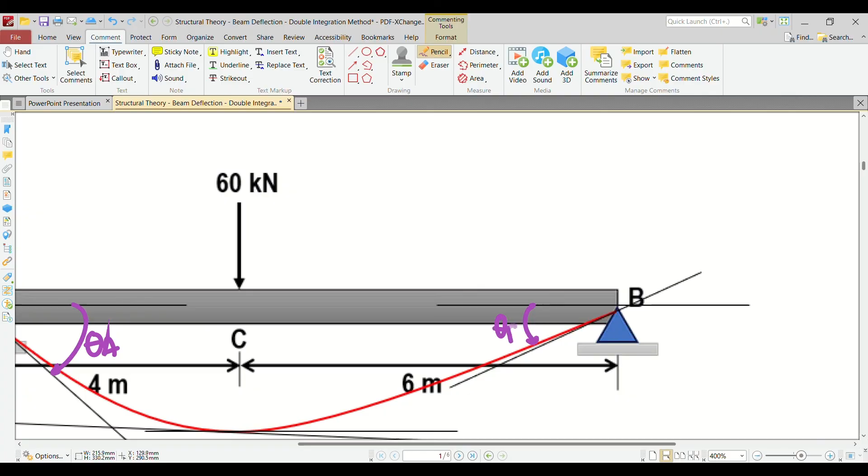Ngayon, for theta B, ang lumalabas is positive 336, so counterclockwise naman yon, horizontal to the tangent line. This is theta B. Now for theta C, ang nakikita natin, negative pa din, so ito yung theta C. Ito yung point C class. Kapag pinroject mo, this is your point C. Ito yung rotation na sinasabi natin, ito yung theta C, clockwise pa din kasi that is negative.

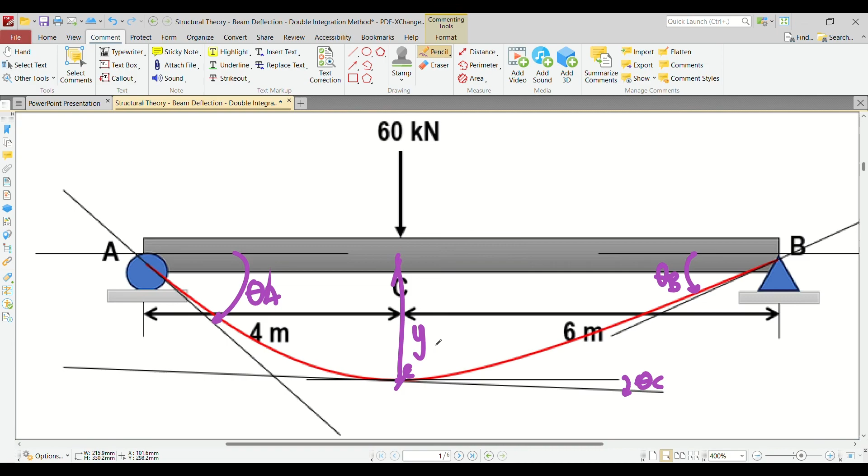Okay, and then if you take a look at deflection sa C, ito yon. Negative lumabas, so downward deflection. So from here to here, this is your yC. And then lastly, the maximum deflection.

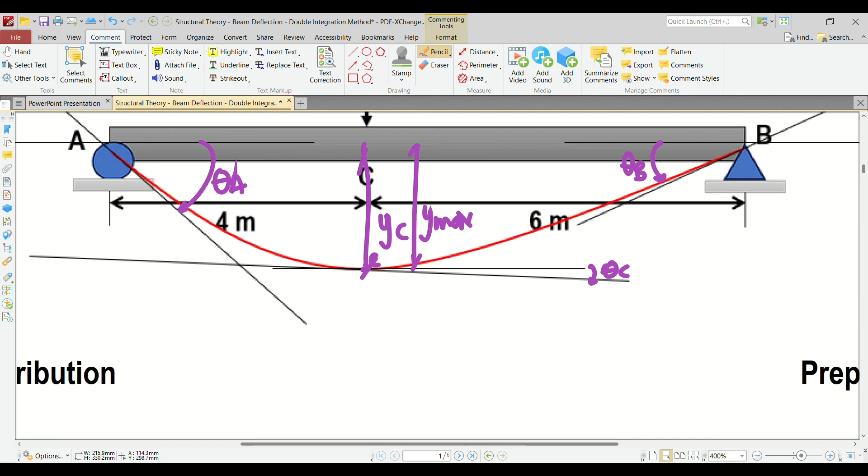How do we determine maximum deflection? Nagpas daw, no? Lagpas daw sa 4 meters. Saan dito? Ayan, no? Yung Ymax natin is lagpas sa 4 meters. So definitely, ito yon, so somewhere here. So this is your Ymax. Okay, so that's how we calculate, o dito, hindi ko lang masulat, no, basta yung pinakababa, yun yung Ymax. Kapag naglagay ka ng tangent line sa Ymax, perfectly horizontal, yun yung maximum deflection. Okay, so that's how we draw the elastic curve of the beam from problem number 1.